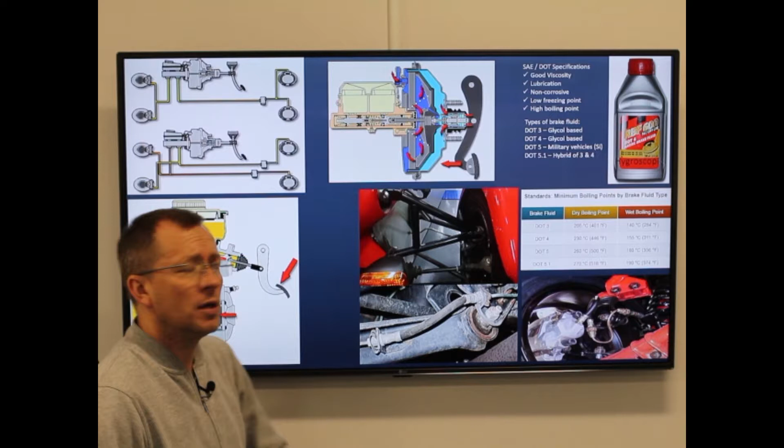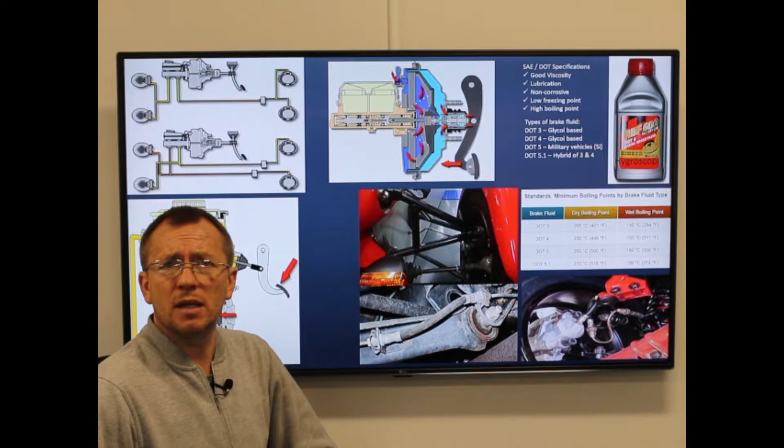Whereas if we have the diagonal split and we have a burst in one of the lines, we're still always going to have one front wheel and one rear wheel operating, which is going to give us at least a 50% brake efficiency and be able to pull the vehicle up nice and straight and square.

So next I want to look at the heart of the brake system, the master cylinder and the plastic fluid reservoir that sits on top. You may be able to recognise this component if you have a look under the bonnet of your car, and you'll be able to see the plastic reservoir with a minimum and maximum level of fluid on there.

Just a word of warning, you should never top up a brake fluid system. If that fluid level is getting to minimum or even below minimum, don't top it up. That's the time when you need to go to the workshop and get it sorted. There's two possible reasons why it's low. You've either got a leak and you don't know, or your brake pads are running low, and that requires more brake fluid out of the reservoir to keep it in contact with the disc. Therefore, the fluid level will drop.

But let's have a look at this component now and how it works. This is called a tandem master cylinder, and this is the bit that makes us able to have this diagonal split system. If we look how it operates, we have our foot pedal inside the vehicle, the driver operates the foot pedal and pushes on this push rod. This push rod comes into contact with what we call primary piston number 1, and that starts to push forward. It then starts to close a port here, which allows fluid transfer from the reservoir into the master cylinder itself, closing that off, and it starts to generate pressure in its little chamber in front of the piston.

Fluid can't be compressed, it passes on the pressure equal and opposite in every direction, which is what it does - passes the pressure down the brake pipes and eventually comes to the road wheel where it operates that particular brake, in this case a disc brake.

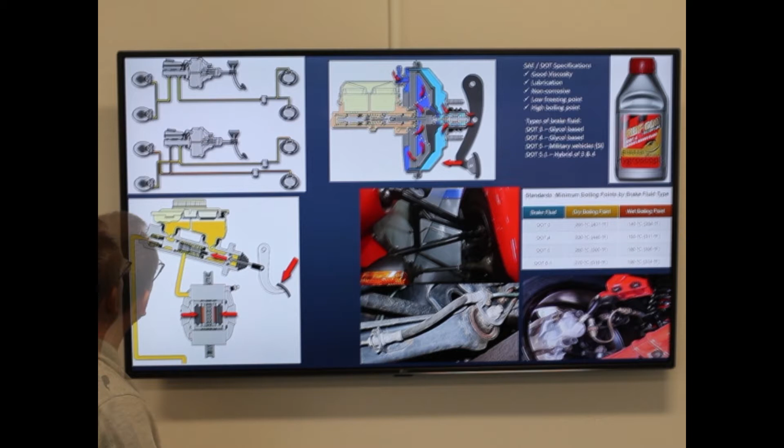So let's have a look at how the master cylinder allows us to achieve at least a 50% braking efficiency should we get a leak in one of the circuits.

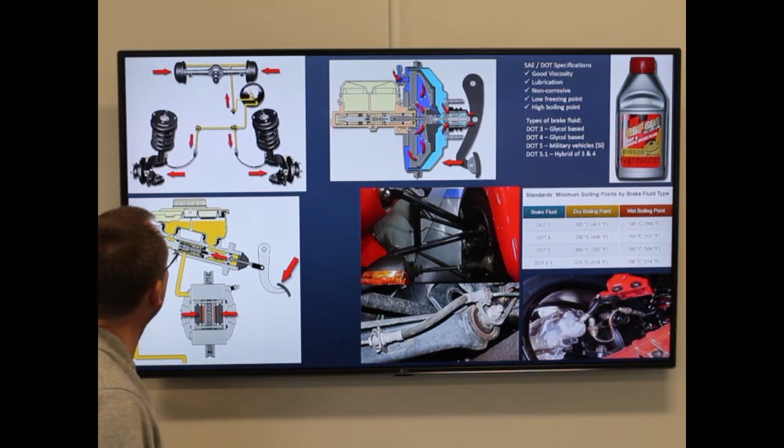If we focus on this side of the diagram, what we can see is our master cylinder reservoir. We've just raised it slightly up so it helps us to visualize things, and we've got the pipe work coming out. Driver operates the foot pedal which pushes on the piston, moving primary piston number 1, generating the fluid pressure in the circuit and then operating the two brakes that circuit number 1 is piped up to.

Piston number 2 starts to move due to the pressure generated behind it, and unfortunately it's got a leak. We don't know why it's got a leak, but it's got some sort of leak, and the piston starts to move forward, and all it starts to do is dump the fluid through that leak, draining one side of the reservoir. If we go back, you can see there's a baffle separating two chambers in the reservoir. So when we do have a leak, it will never completely empty the fluid reservoir, it will only empty one side.

If we flip it and say we've got a leak on the primary circuit, how is that affected? So the driver operates the pedal, piston number 1 no longer can generate pressure, it's got a leak, so it starts to move forward through its cylinder, dumping the fluid out of its chamber.

You can see now it's starting to drain the opposite side of the reservoir. But we said previously that the pressure generated in front of piston number 1 moves piston number 2. We're no longer generating any pressure, so we have to make a physical contact and move piston number 2 mechanically instead of hydraulically.

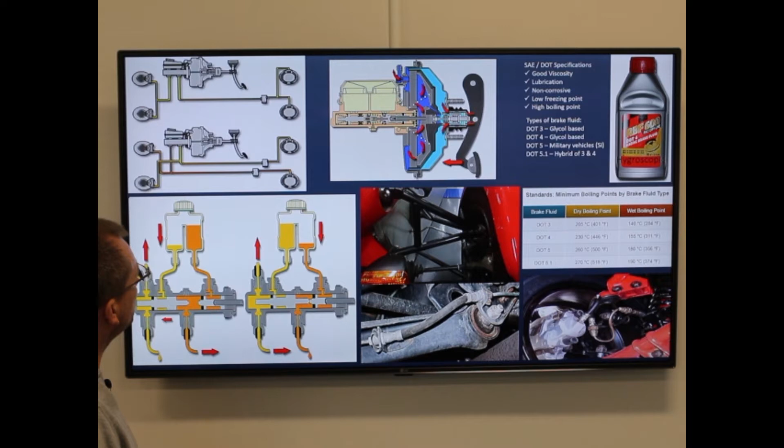If you've ever been sitting in the driver's seat of a car being pushed with the engine off and you've needed to use the brakes, you will have noticed that the brakes are ineffective. And that is because of this component here, the brake servo or brake boost.

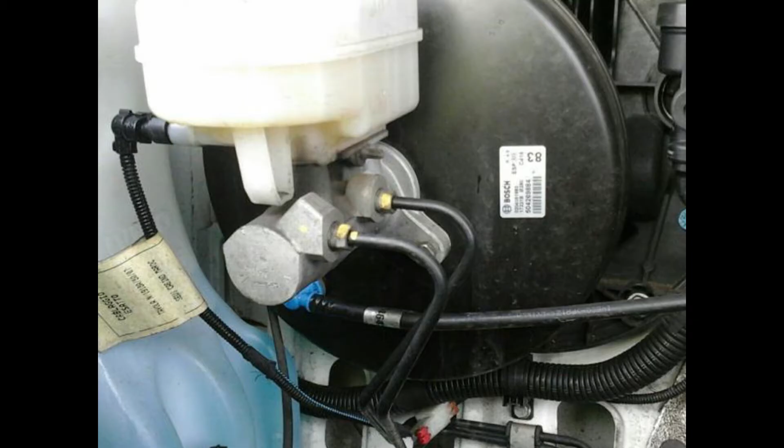It sits between the driver's pedal and the master cylinder, and you may recognise it underneath the bonnet of your car as a large black circular chamber. What we've got inside is a rubber diaphragm creating two halves of this chamber. One half has a return spring that when the foot brake is off will push the diaphragm back to its natural resting position.

We have a couple of one-way valves situated here and at the top, and this one-way valve here is piped off to engine vacuum, which on a petrol engine will be provided by the inlet manifold, and on a diesel engine will be provided by a mechanical vacuum pump.

The other side, the one-way valve, will open up to atmospheric pressure. So when the engine is on and the foot brake is not being operated, both sides of the diaphragm are equal pressure, and that is engine vacuum pressure.

As the driver drives down the road and operates the foot brake, he uncovers and opens up the one-way valve at the back here that allows the right-hand side of the chamber to fill with atmospheric pressure, which is 14.7 psi or 1 bar at sea level.

So now we have a pressure difference in the chamber. We've got higher pressure on the right hand side, lower pressure on the left hand side. That causes the diaphragm to move towards the master cylinder, increasing the force going into the master cylinder. The simple calculation is force equals pressure multiplied by area.

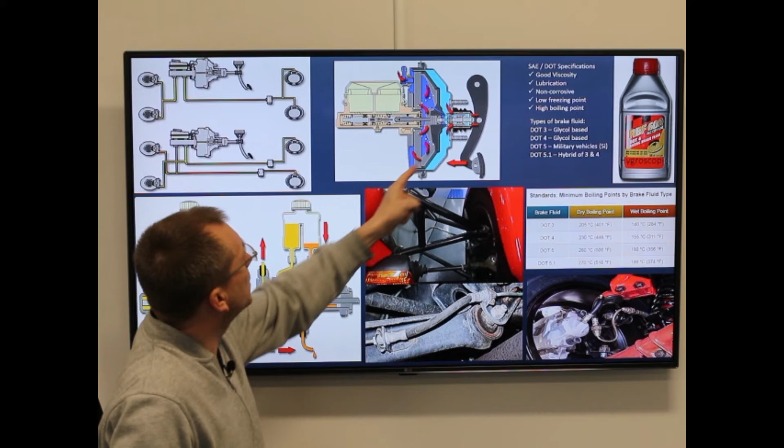The pressure is provided by the driver's foot, so that would remain constant. The area has now been vastly increased because it's now the area of the large diaphragm. So the force going into the master cylinder has now increased greatly.

The final section of today's video, I want to look at brake pipes. These can be split into two categories: solid metal pipes or flexible pipes. Flexible pipes can also be split into two categories. We could have rubber hose, like this particular one here, or a braided hose, like this particular one you can see here. Essentially they do the same thing.

A braided hose will be found on a more high performance vehicle where greater pressure is required in the braking circuit. If we concentrate on the front steered wheels, what you will always see is a flexible hose of some sort, braided or rubber, going to the brake caliper.

This will allow for suspension travel up and down and steering axis left and right. If it was a solid pipe, the constant movement up and down and left and right would eventually fracture the metal pipe and cause a leak.

Depending on your vehicle suspension at the rear, you could find either a single rubber hose down the centre of the axle with two metal pipes going to the road wheels, or you could find the same setup as you would at the front wheels.

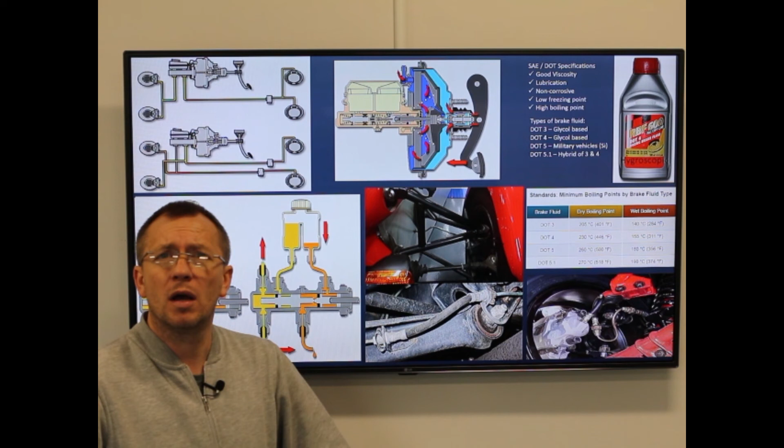Now your metal pipes from manufacture will be steel and they'll be coated in a plastic. The last 2.5 centimetres, 1 inch of the brake pipe will be exposed metal and the plastic will stop. Unfortunately over time this is where it will start to corrode and perish, eventually requiring replacement by the workshop.

Now when these are replaced, they will be replaced with a supple copper brake pipe that the technician can mould and shape into the original, to match the original brake pipe so it doesn't hang down and catch on anything.